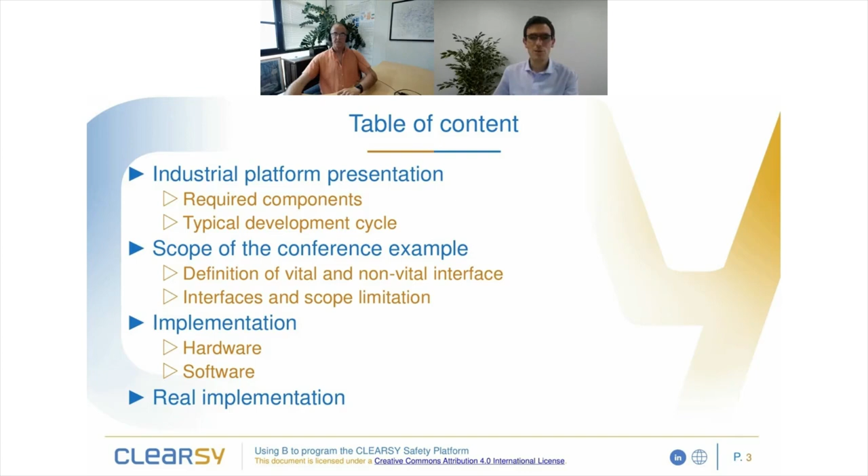We'll refine the level crossing example in order to define what is vital and non-vital in terms of interfaces and how to implement it within the scope of this conference. Then we will dive inside the implementation for both hardware and software. And finally, we will see a real implementation with a physical mock-up with 3D printed barriers and some motors.

So for the sake of reusing existing work, in this example, we'll use the starter kit, which is provided by CLEARSY and offers 32 non-safety critical inputs and non-safety critical outputs, and which also offers a USB interface, which is convenient for the purpose of a demonstration.

For programming the board, you will need ICD4, which is a programming tool from Microchip. A programming cable, obviously, for connecting the programming tool to the computer board, and a few wires, so USB, DuPont wires, and obviously a laptop for development.

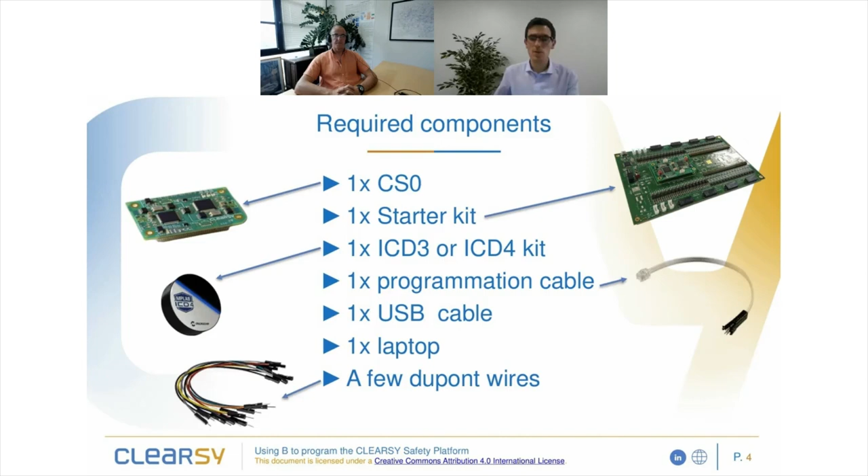Just to remind where we are in the overall flow of the presentation. So for the industrial version, you have more degrees of freedom. You can modify the scheduling of the main loop. You can define when you want to call the sanity checks, so the built-in self-test. The F transfer function can be designed in sequential or in interrupted code with B or C.

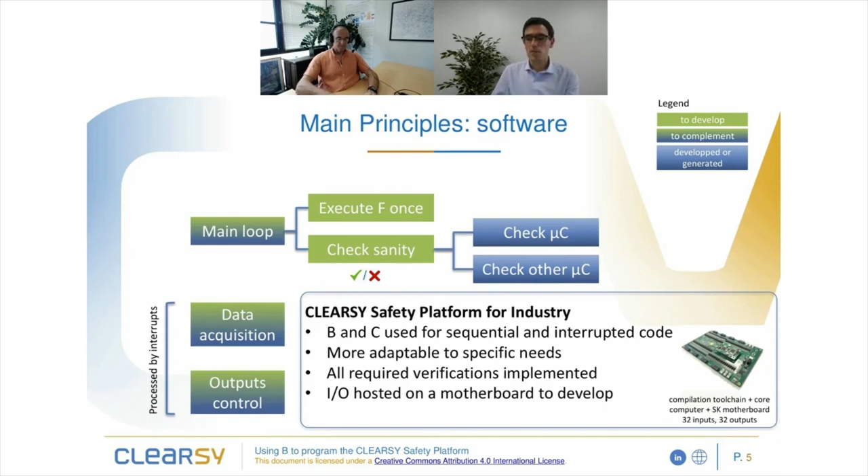For vital and safety parts, you will need to use the B language. And you have also full freedom in terms of design of the data acquisition and output controls. So basically, it's more adaptable to your own specific needs, but it also requires more work. Everything is implemented, so it's safety ready, and you have to design a motherboard in which the computing board will be plugged.

The development cycle of a safety critical system relies on standards, and standards imply having a very well-defined design cycle to ensure a high level of quality and reduce the risk of errors and bugs. So the first step consists in splitting the features between vital, so safety critical, and non-vital features.

Then you have to follow the prescription of the standard, obviously, and if you use the CLEARSY Safety Platform, then you will have to comply with what is called the Safety-Related Application Conditions, so SRACs, which are basically the exported constraints of the platform. So if you meet all the exported constraints, then you can rely on the fact that the platform is safe.

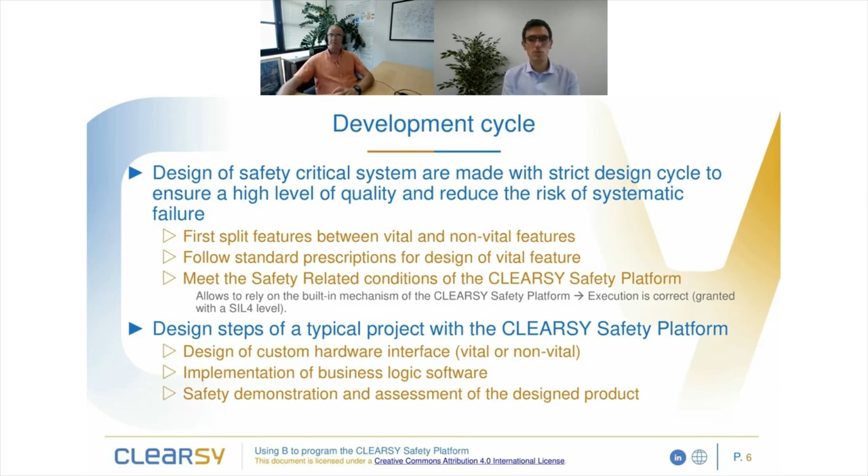The design steps for using the CLEARSY Safety Platform consist in designing your custom hardware interface. So here, it's basically the main motherboard plus an extra board that we will discuss just after. Implement your own business logic, so in our case, the level crossing logic. And finally, perform the safety demonstration and assessment to reach certification level.

So a few words about the safety-related application conditions of the CLEARSY Safety Platform. So it's a list of 24 exported constraints, which are addressing various fields of the topic. 5 of them are related to the system design, 11 to software, 3 to hardware, and 5 to exploitation and maintenance operation. For this talk, we will focus only on 3 of them, which will be detailed in the next slides. And if you want to have a look at the full list of exported constraints of the CLEARSY Safety Platform, you can find them on GitHub.

So the idea here is not to read all the text. I will give you some fast way to understand what is below. So the first one is related to restrictive value. So SRAC 1 is called restrictive value. And the idea is before designing a safety critical system, you have to define a restrictive state in which your safety property, the one you want to ensure, is obtained.

So in our case, basically, as Thierry said before, we want the barrier to be closed when there is a problem or when there is a train. So we define the restrictive state as barrier being closed, and we need to be sure that when there is a failure or when the platform is unpowered, then this property of barrier closed is held.

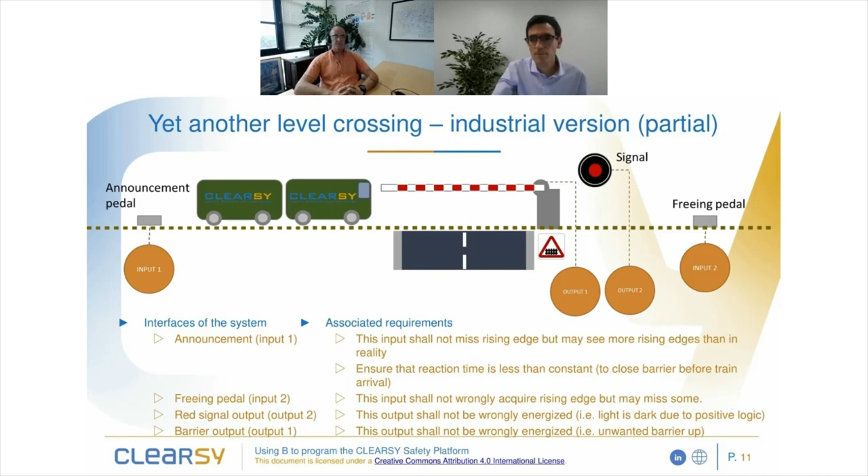Unfortunately, within the scope of this conference, we cannot cover all these interfaces with the proper integrity level. So we made choices. From a hardware point of view, everything will be done with the motherboard, so it's non-vital hardware. In order to have one vital interface, we add an extra board, which is a safety critical circuitry for driving one output, and it will be used for the barrier.

So the barrier will be controlled through real industrial hardware that can ensure a SIL4 level, the highest integrity level. And in terms of software, the management of the barrier will be done through a full vital implementation. For the inputs, we will only focus on the guarantee of timings. As the underlying hardware is non-vital, it does not really make sense to develop safety critical software for non-safety critical hardware input circuitry.

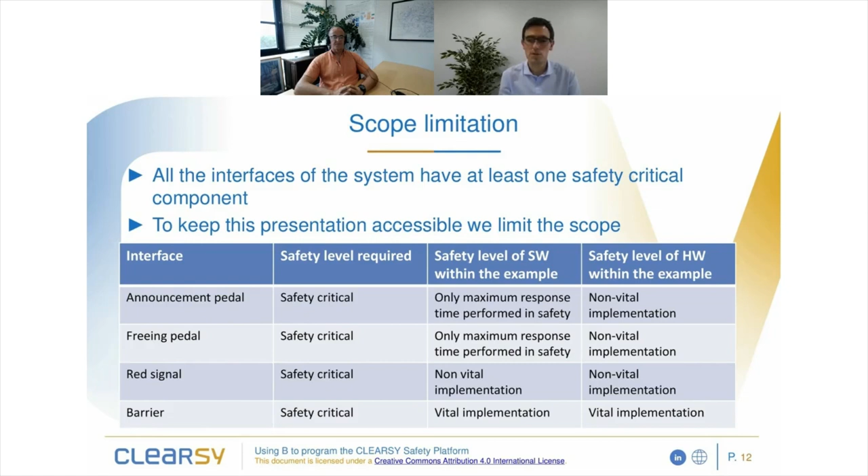Before moving inside the implementation, just one slide about the properties that we want to guarantee. So the property that we want to guarantee is that the barrier is open only if the system has seen during the last second the area not occupied. So in any other case, if during the last time slice between now and now minus 1 second there is one axle or more in the area, then the barrier shall be closed.

Here, the 1 second value is simply a placeholder. It's a software constant, and it corresponds as a first approximation to the time of travel of the fastest train between the announcement pedal and the road. So it's the time, the maximum delay that we can have before closing the barrier.

We had an extra constraint which comes from software analysis, which is that if a variable overflows, we can loop to 0 and consider wrongly that the area is free, and then the barrier will be wrongly commanded in an open state. So we limit the number of axles within the area, so between the announcement pedal and the freeing pedal, to 8.

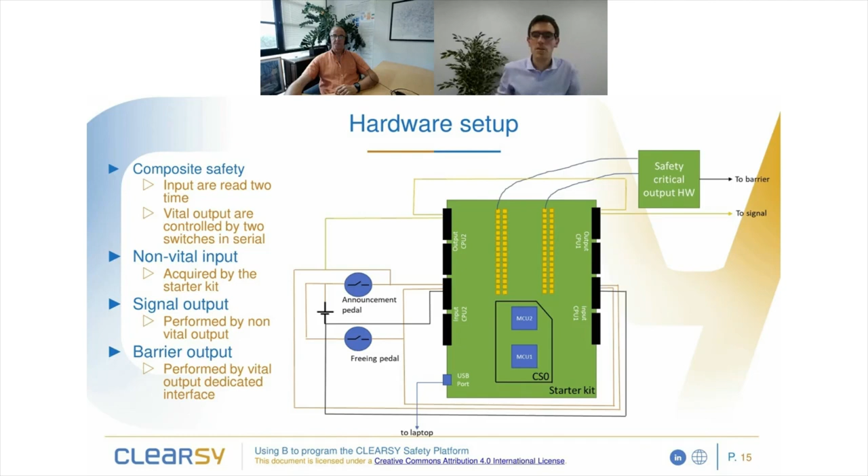In terms of safety outputs, we use 2 relays in series. The use of 2 relays is also motivated by composite safety, so each relay is controlled by 1 microcontroller. And if you zoom out from the board, you can see the safety critical output dedicated board as a converter from 2 frequencies into 1 on-off output. 2 frequencies, because frequency 1 is generated by the first microcontroller and frequency 2 is generated by the second microcontroller. And we use a frequency because if the platform is frozen and keeps the current state, then it's no longer a frequency and the output will be restrictive and the barrier will close.

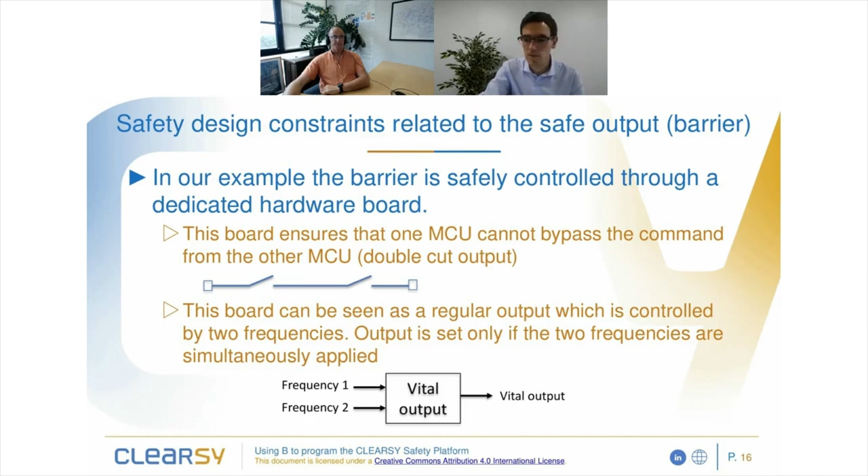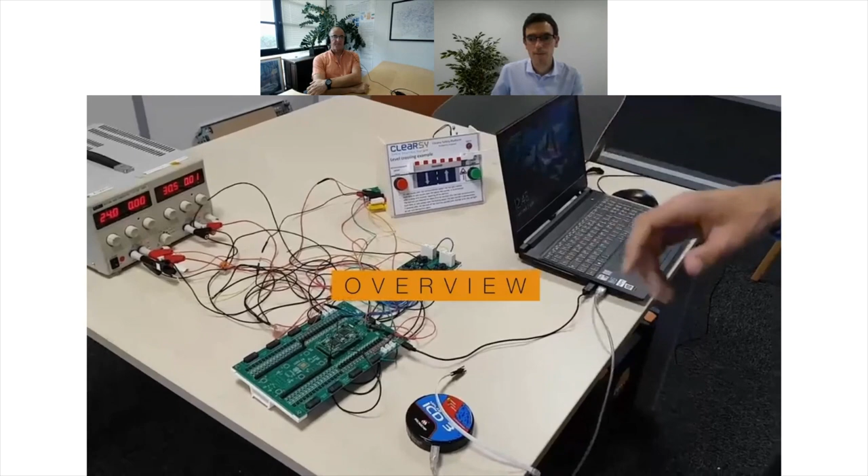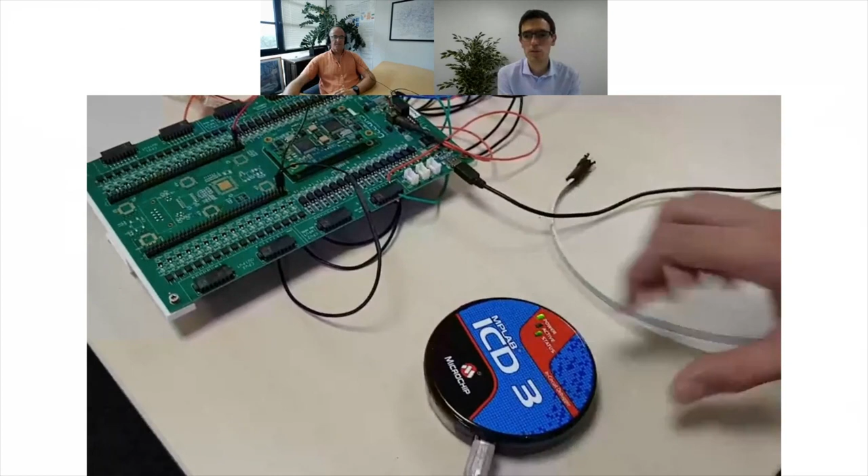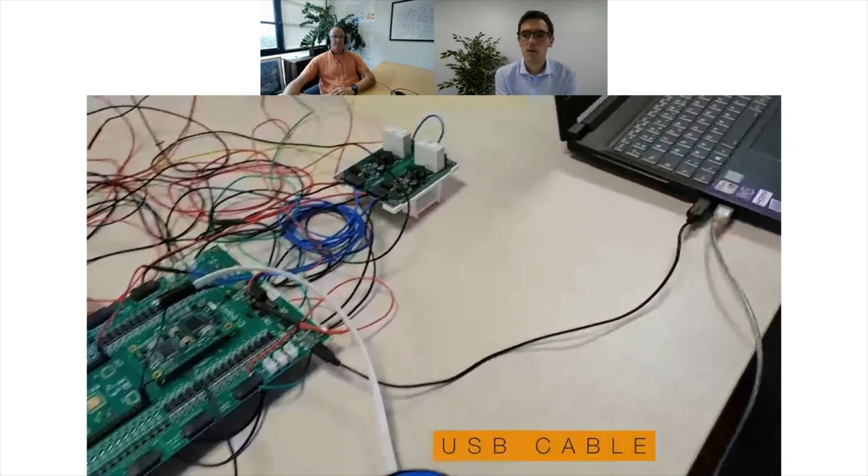So a quick overview of how it looks on the desk in the lab. So here you have the full setup. So that's the CLEARSY computing board. It's only a computing node with the 2 microcontrollers. Here you have the motherboard, which provides inputs, computer interface, outputs, and a way of plugging in the computing board. Here you have the programming tool from Microchip, the programming cable, which on one side is plugged into the programming tool and on the other side will be put directly on the vital safety computer. 1 USB cable, okay. And the software design laptop.

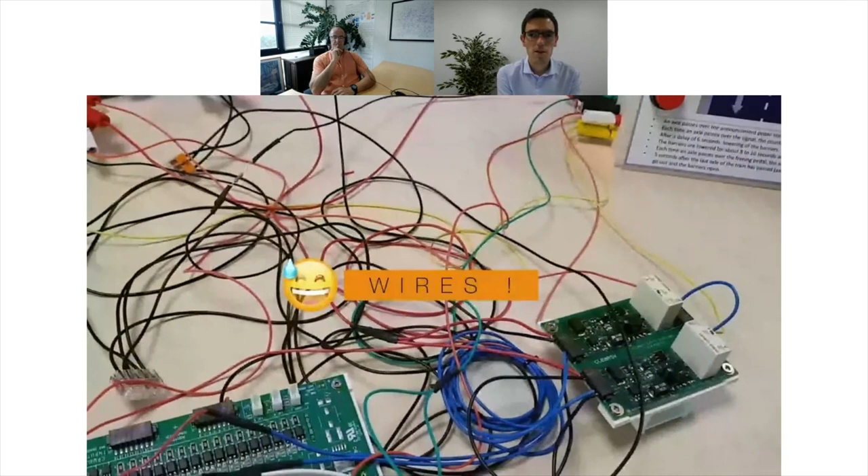Here you have the safety critical output board, the dedicated one with the 2 relays that are in white. So the white boxes are the relays, and you have 2 independent channels. In the middle, you have a lot of wires. And here you have a plywood plus the barriers, the 3D printed barriers, and the 2 buttons for entering and exiting the area.

In terms of software, the CLEARSY Safety Platform software is bundled inside a single tar file, which contains documentation, ready to compile examples, and the official CLEARSY Safety Platform library, which is a precompiled binary library, which provides all the primitives for the safety built-in self-tests and other software primitives and functions for performing your work.

In terms of design, what remains is to design the non-vital source code, which will be located in the nr_src folder, nr for non-replicated and src for source. Here you will find basically the driver interfaces for your custom interface and all the scheduling of the application. The safety critical software will be written in the B formal method and will be located in the r_src folder. And you will find the model for counting the number of wheels in the section, how to generate the frequency for the safety critical output hardware, and the deadline mechanism for ensuring that the inputs are polled at the correct pace.

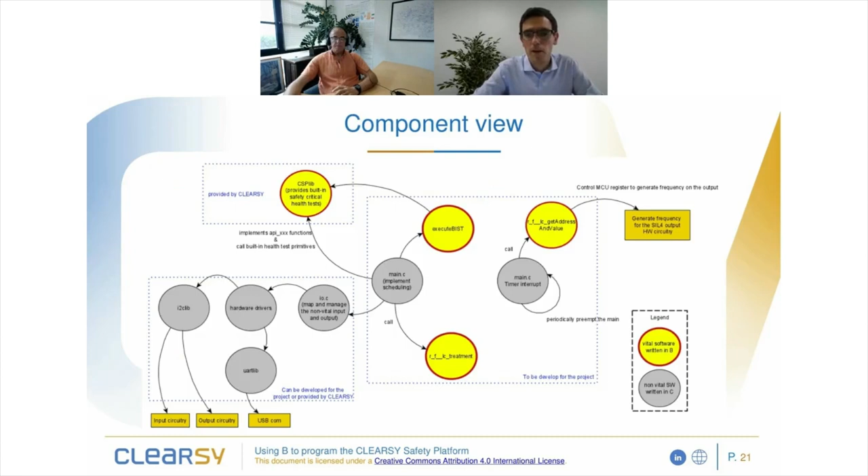So the component view: in yellow, you have the safety critical software, which is developed in B. And in gray, you have the non-vital software. In the middle, you have the project-specific part. On the middle left, you have the main.c that is calling the built-in self-tests and calling your own custom logic, the LC treatment, level crossing treatment. And in the right of the middle box, you have the interrupt, also implemented in main.c, which is calling another part of your B model.

On the left of the picture, you have all the driver layers in charge of the interface with the real world. All these parts are hidden in the education version, but are available for the industrial version. And on top, you have the CLEARSY Safety Platform library, which provides some API entry points and also all the built-in self-test primitives.

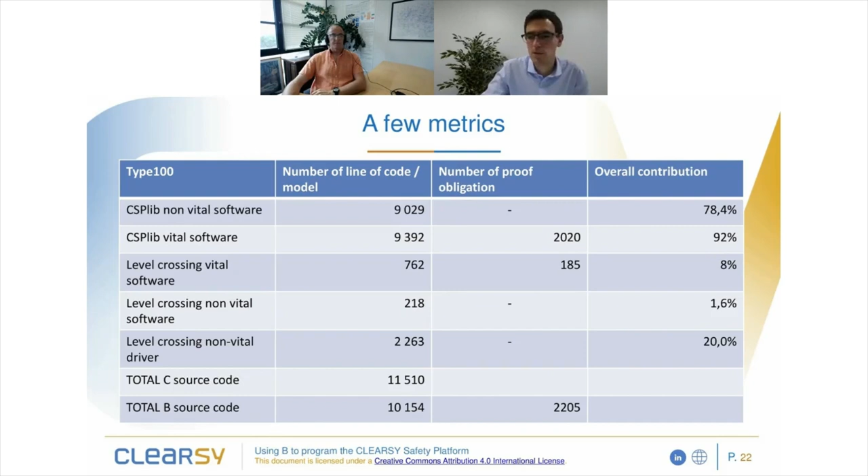A few metrics about the software. We compare here what has been developed specifically for the level crossing in comparison to what has been performed for the CLEARSY Safety Platform library. So in a nutshell, in terms of safety critical software, level crossing only represents 8% of the work. And in terms of non-vital source code and drivers, the split is 20% for the example and 80% for the platform. So it's worth using the CLEARSY Safety Platform. It will save you a lot of time.

So for getting the inputs, you can write regular C and you can get some primitives from the platform. In our case, nr_f_get_time_ms and nr_f_get_time, NR for non-replicated function. These functions are provided by the CLEARSY Safety Platform library and provide the system time since the startup of the system.

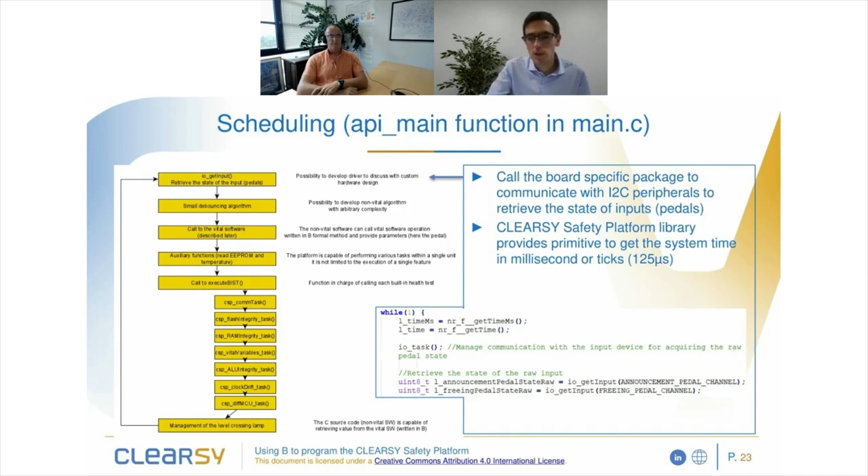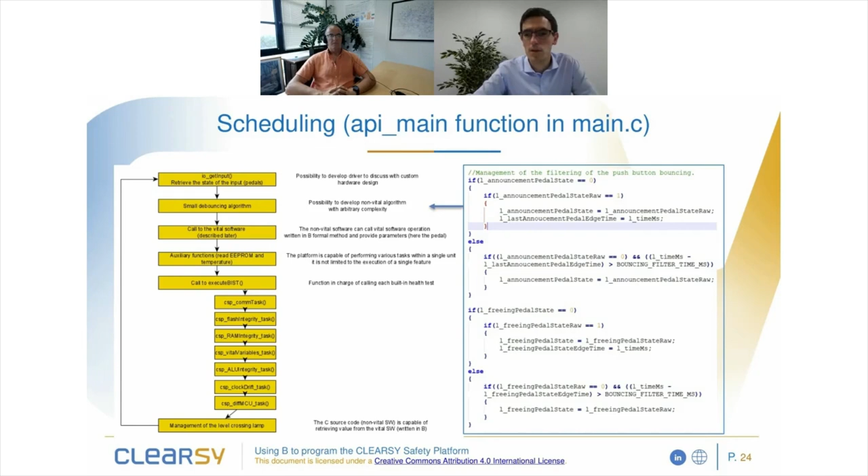The second part is the debouncing algorithm, so there is no need to dive into how we debounce a push button. It's not really interesting, but just to see that we can perform arbitrary logic and algorithms directly written in C.

Then we have to call the core part of our application, which is rf_lc treatment. It's an operation of the B model. So the software is replicated, and here we see that due to this replication, we have to call replica 1, so r1__lc treatment, and then r2__lc treatment. But here, the two functions are generated, and when you write your B model, you only have one operation to write.

Then we have the built-in self-test. So here we made the choice to write them in sequence and to call them in sequence. Once again, the scheduling strategy is free to the end user. So if you have an application where your timing is constrained at some time and not at other times, you can decide to perform part of or all of these tests at a different moment.

And finally, we have the management of the level crossing signal. So what is interesting here is that we can retrieve from the C source code information from the B model. So non-vital software can read some values from the safety critical software, and it's performed with getter functions. And here we need to call only one because the guarantee that the two replicas have the same value is ensured anyway.

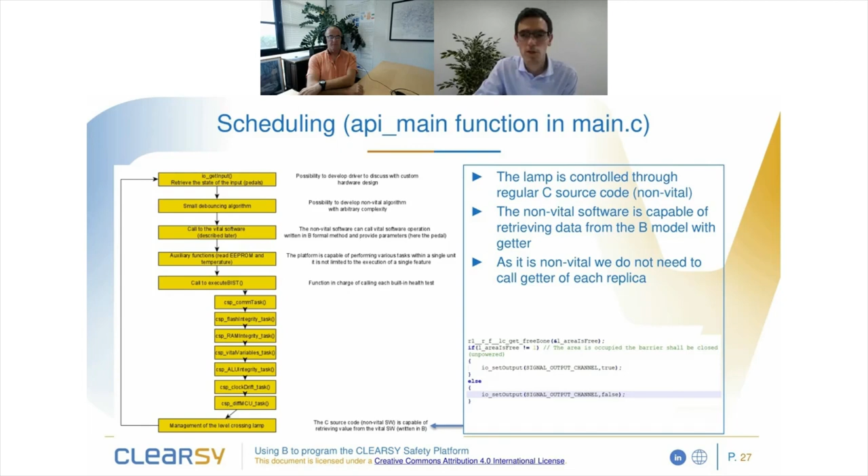At this stage, we have the management of the inputs, the management of the signal, and the remaining part is the barrier itself. So as said before, we need to generate a frequency to control the barrier. The frequency is generated with a timer interrupt inside the microcontroller. So the timer is always running and the interrupt service routine is always executing since the beginning. And it will apply a square wave or not, depending on the state of the B model. And the value inside the safety critical software is voted using the safety primitive of the library.

And we have two getter functions, one getter function replicated, which is called get set address and value, which returns a pair of an address and the value to apply at this address. And the address is the address of the register of the corresponding pins of the microcontroller. And the value is the value we want to apply on this pin. So this way, we can vote between the two replicas before applying an output in the physical world.

Now we can discuss in more detail the formal model, so the one in charge of the safety critical software. So we start with the assertion that defines our safety property, which is that the zone is free only if during the last slice of time between now and now minus 1 second, no axles have been detected inside the area. And then we have other conditions to say that the barrier is closed when the zone is not free.

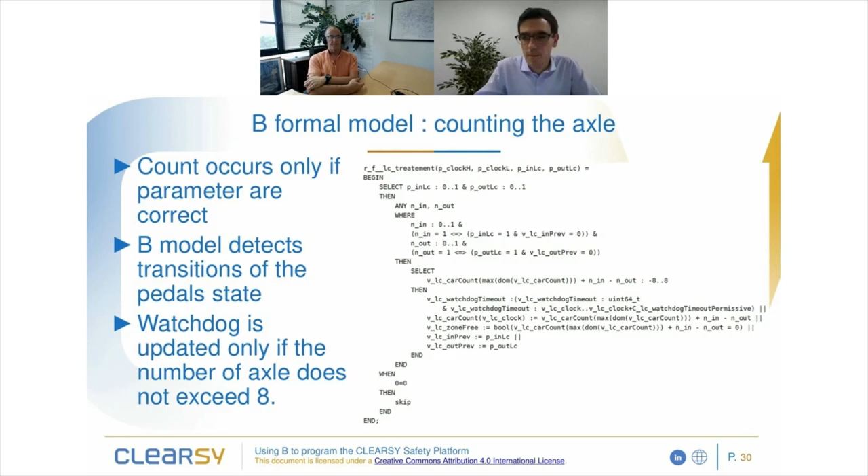And finally, we apply the state, so it's the getter we saw in the interrupt service routine of the timer. So it's simply a getter which returns the address and the mask of the register of the pins and the value we want to apply on the pin. And what is interesting to notice here is that we will return an on state on the pin only if the zone is free, so it's what we expect, but also if inhibition is false.

So what is inhibition? Inhibition is a variable managed by the CLEARSY Safety Platform, which will be true as long as not all tests have passed; it will become false when all the tests have been passed at least once. So if one of the self-tests has not been passed, then the inhibition is set. It's to manage the startup time of the platform when all the tests have not been performed.

When you have written all your source code, then you have to define a project, and it's done through the configuration file. So it's a text file in makefile format, which simply contains a list of predefined constants that you only have to fill in with the proper values, which correspond to the files that you are using inside your project. So you can modify compilation options, define where the manifest of your B project is, and so on.

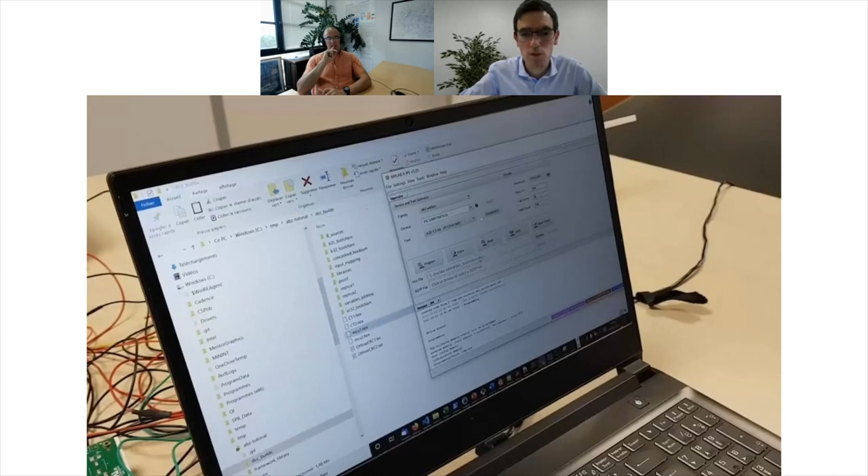Once the compilation is done, the results will be provided in a DCC builds folder, which will be automatically appended to your working directory. You have intermediate files and MCU1 and MCU2, which are the two binaries that you have to load on the target. When you want to load on the hardware target, you connect the programmer, you power up the board, and you click on program.

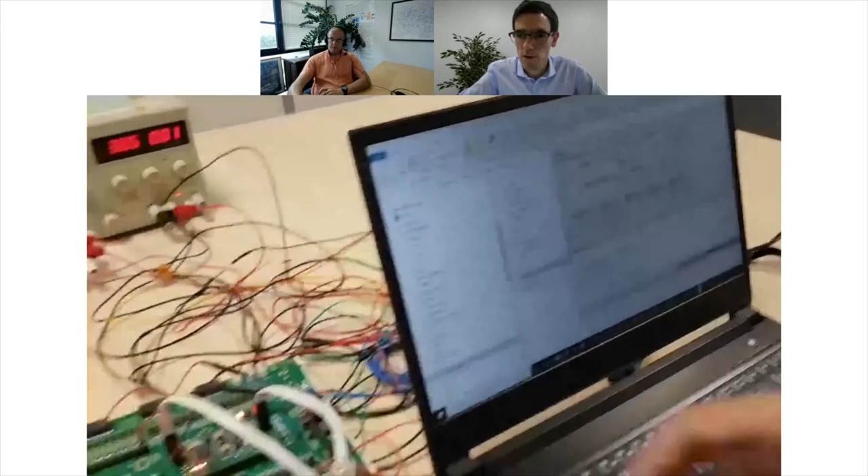Programming is performing. Once it's done, you disconnect the first microcontroller, you select the other binary, you connect the second microcontroller to the board, and then you click on program. And once it's done, you only have to recycle the power of the board, and then you are ready to play with your new software.

So, second video, how it looks like when it's loaded. Too many videos to find. Okay.

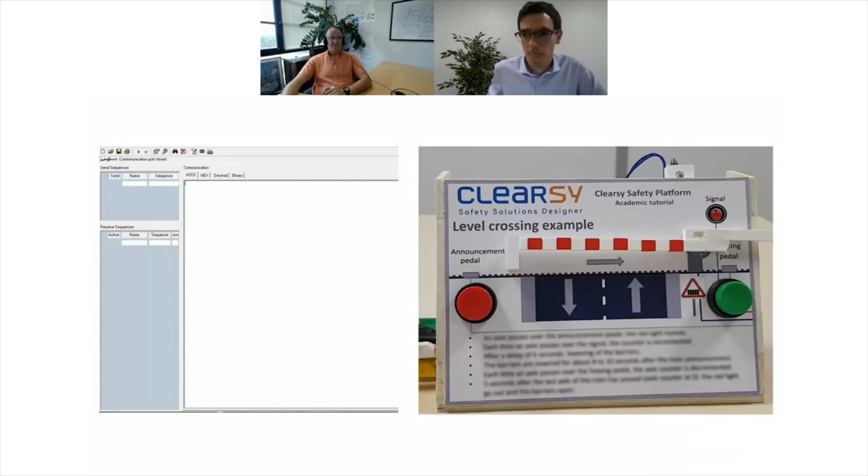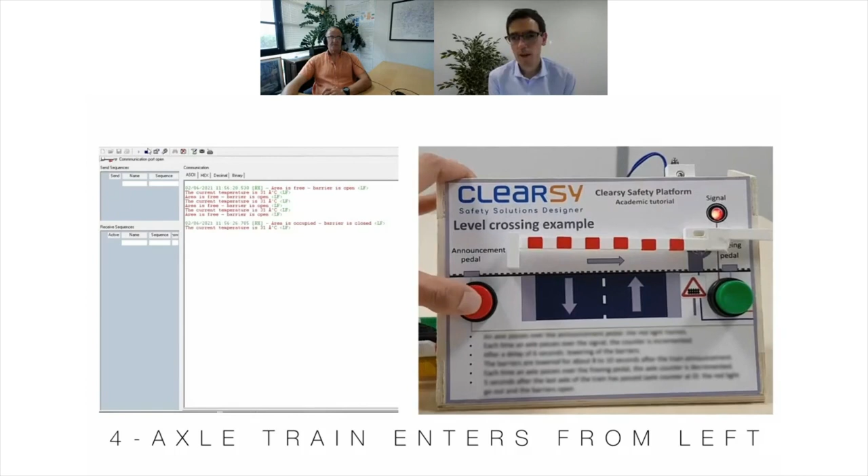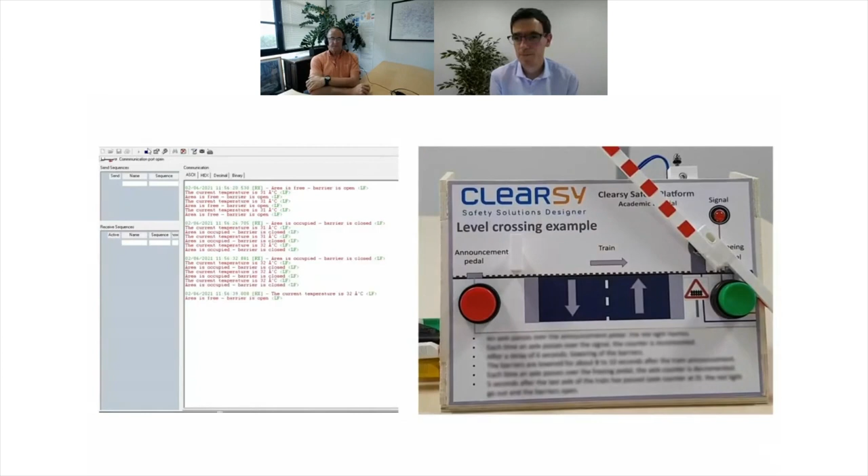So here you have the setup. At startup, the barrier is closed because we haven't performed all the built-in self-tests. When inhibition is removed, the barrier opens. We count 4 axles entering from left to right. The barrier is closed and the signal is on. We have the 4 axles leaving the area and the barrier opens. We had 1 axle, the barrier closed, 1 axle, the barrier opened.

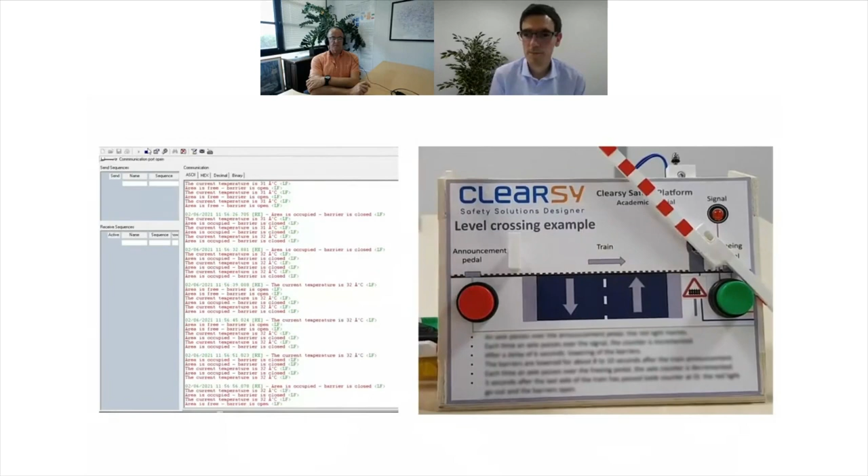And in reverse order, we have 4 axles entering from right to left, and 4 axles leaving the area. So that's for the nominal case.

We will now see what happens in case of dysfunctional use cases. We will discuss all the examples and scenarios before, and we will have at the end a video summarizing each of these cases. The first one is related to not calling the built-in self-test frequently enough. What happens in case of an overload of the CPU resulting in a slowdown of the execution? What is the result of a corruption of the flash memory, a corruption of the RAM, and the case of a systematic design failure?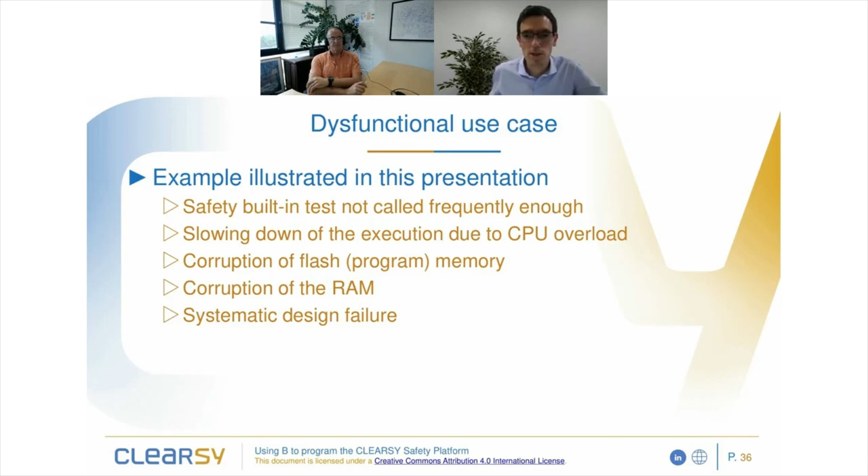So if we do not call the built-in self-test frequently enough, the system will simply shut down because we don't know if our platform is healthy or not. So we decide to take the safe state, which is barrier closed.

So in order to simulate this behavior, we replace the regular function in charge of calling all the built-in self-tests by a function that calls all the built-in self-tests normally during the first 15 seconds, and then we forget to call one of the tests by simply commenting it. And in this case, as we will illustrate after, the barrier closes after 15 seconds.

The second dysfunctional case that we can study is the slowdown of the execution. So it can be the result of denial of service. It can be the result of an exotic branch of your application that is executed once a year, but takes a lot of time before returning. So in this case, we will not acquire the states of the announcement pedal for a potentially long time, and the train may reach the road before we have taken a restrictive action. So there is a real collision hazard in this scenario.

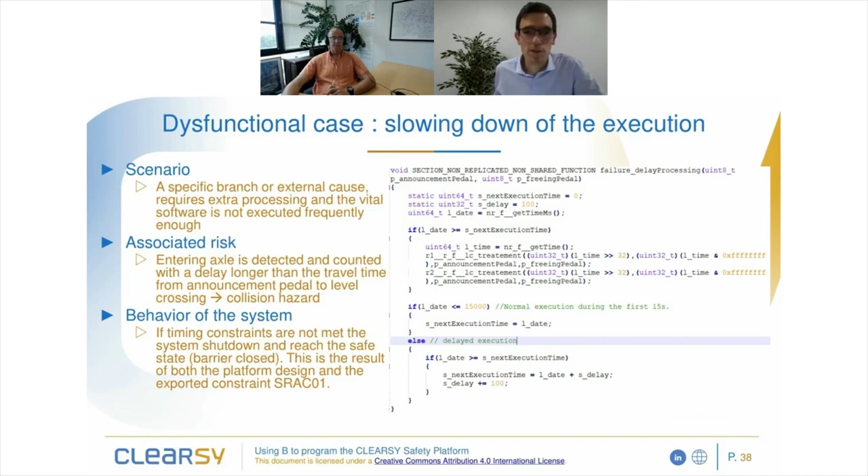So the behavior of the system in this case is to shut down because you don't meet the timing and you don't comply with the assertion that we have seen before. And in order to simulate the delay in processing, we have written this small function, which is called during the first 15 seconds, 15 for the same reason as before, to have enough time to go after the inhibition period of the startup. So during the first 15 seconds, we execute the software normally, and then we delay the execution, the call to the LC treatment function. And as it will be demonstrated just after, the barrier closes.

The case of the corruption of the flash. So during the life of your product, the memory can be corrupted. If it's a picture on your smartphone, it's not really critical. If it's the software of the level crossing, it can have a larger impact. So in order to simulate this behavior, we directly edit the binary file manually, and we flash the modified binary directly on the target. And we will see that in this scenario, inhibition will never be removed, and the board will start by complaining about a corrupted flash memory.

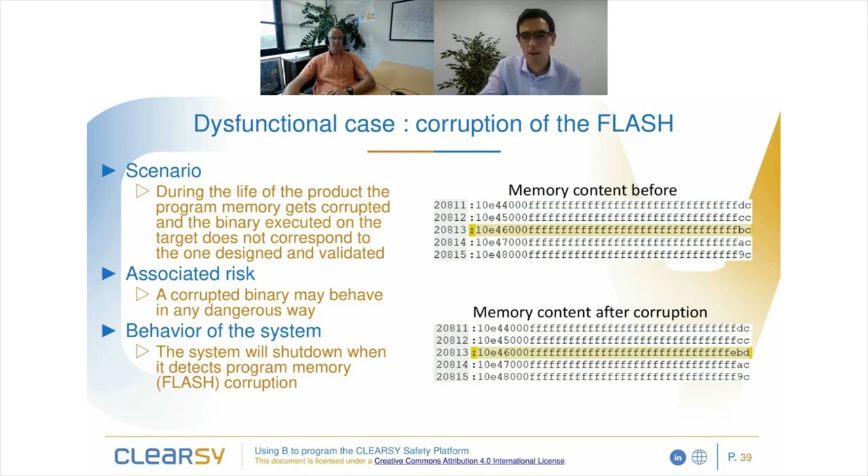Corruption of the RAM, so it can be due to a cosmic ray or an EMC perturbation. It can also be the case if you have one of the two compiling toolchains that produces an error, and one of the two replicas has a corrupted value. The associated risk is if you write the variable in charge of saving the state of the area, if it's occupied or not. If you modify it in the way that the area is free, and it's not the case, then you will have a barrier up, which is not allowed.

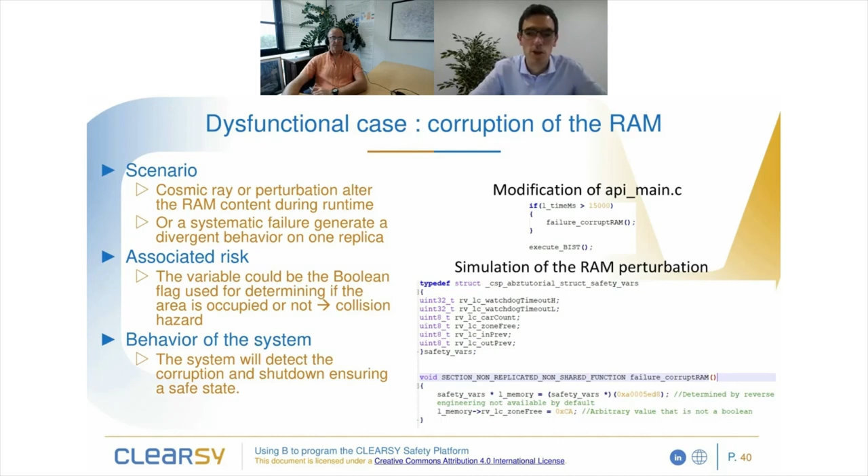So in order to simulate this behavior, we have added some information to the source code. This information is reverse engineered, so it's not accessible regularly from the C source code. So it's basically the organization of the safety critical variables and their addresses, and we write a random value, here 0xCA, inside the memory. And in this case, the corruption will be detected, and the system will shut down and the barrier will be down.

And the final dysfunctional case that we will illustrate today is a case of a design failure. So as explained before in the properties that we want to guarantee, we want to detect if there are more than 8 axles entering the area. So 8 here is for the convenience of using the mockup, because max uint8 is 256, and it's quite long to press 256 times on the button. So we have limited it to 8, but if we have an overflow, what we can fear is that due to operating conditions, let's say every train has 6 axles, you do some maintenance operation on the announcement pedal, and you count 3 axles during the night.

You remove your maintenance operation, and the first train entering the station the day after has 6 axles, everything is fine. 6 plus 3 is equal to 9. Yes, in mathematics it's correct. If the variable overflows after 8, it's equal to 0. And in this case, you will have a train in the area, a counter of axles that is equal to 0, and a barrier that is up.

So there is a real collision hazard, and in this case, if you don't prove your model, and if you don't analyze this kind of failure mode, and you have a systematic design failure, you are rightly executing the wrong function, and in this case, you will kill people.

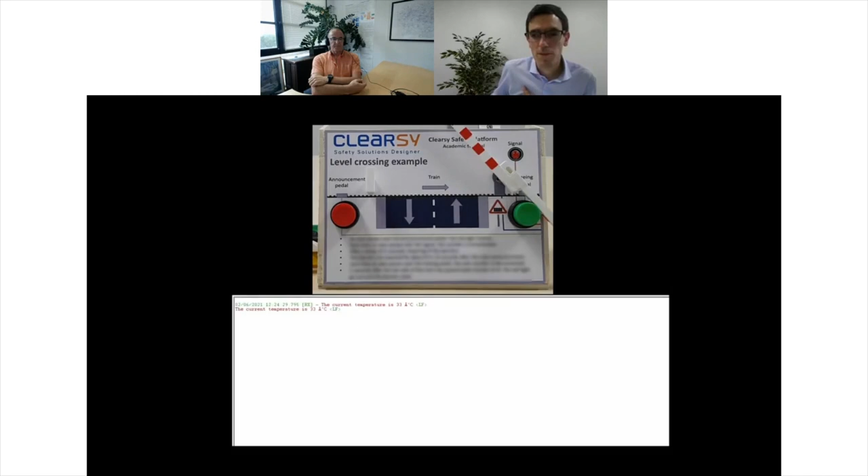So a video for illustrating all the dysfunctional cases that we saw before. So they are in sequence. So the first one is the built-in self-test. So we do not call the built-in self-test frequently enough. The barrier is open, and then after 15 seconds, it fails. So you have a message saying that you have not reached the deadline.

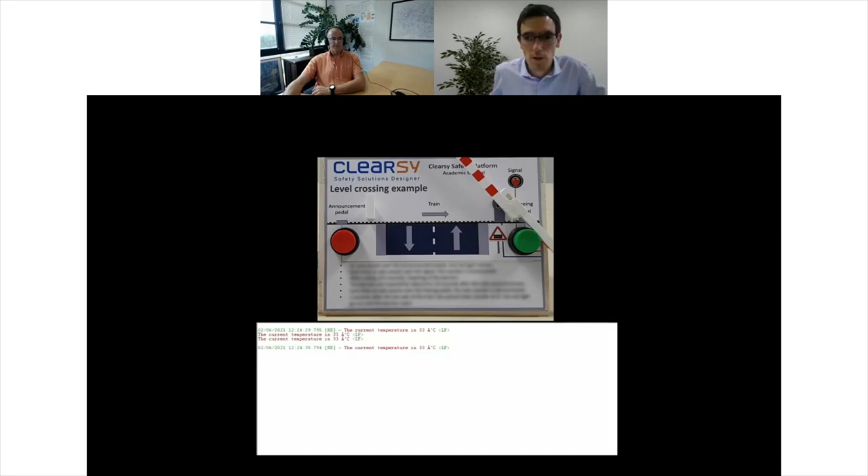The second one was the slowing down of the execution. So same, it looks very similar, but in fact the result is always the same. So the corruption of the memory, you have flash memory corrupted printed all the time inside the debug interface, and the barrier will not go up.

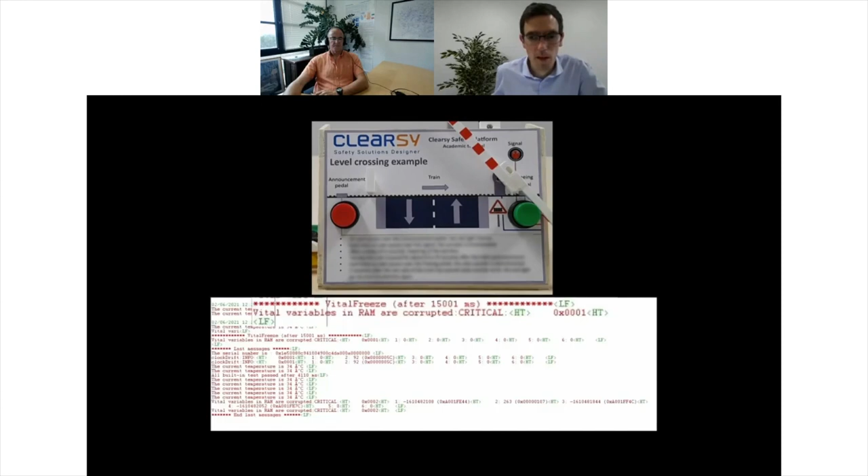What you can notice here, and it's also the case for the other videos and use cases, is that the signal is dark. It's because it's managed in a non-vital way, and here we shut down the platform, so we cannot provide energy to the outside. So due to gravity, the barrier closed, but the signal cannot be on.

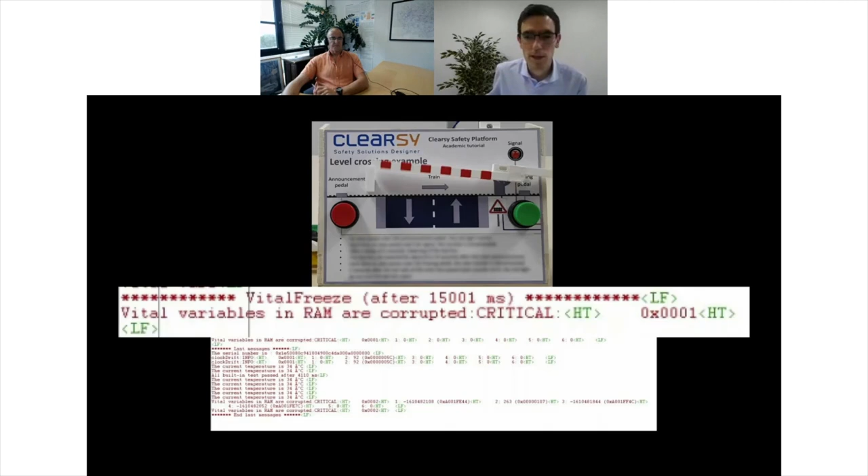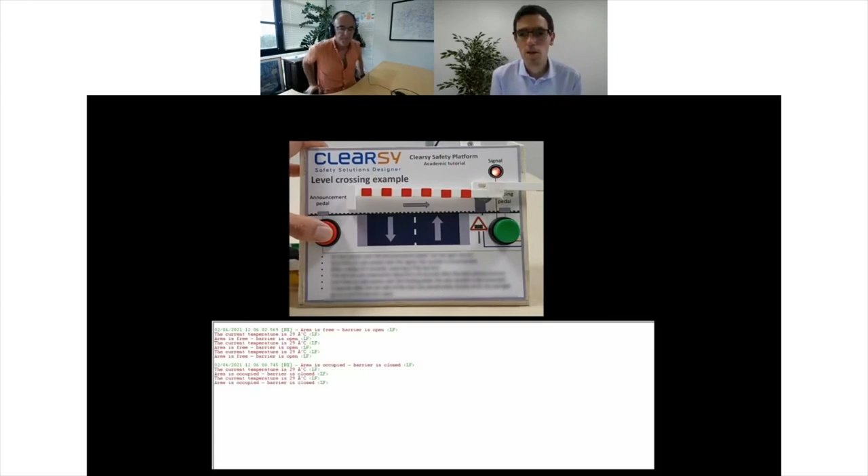And for the systematic design failure, we will press 9 times the entering button, so the announcement pedal. And here you have an error, and you can see that even if we press 9 times the button for freeing the area, the barrier remains closed. So in case of failure, in case of shutdown, the red LED lights up.

We have a question before moving to the next part, the last one from Jaya Prakash. Is this level crossing model installed by CLEARSY anywhere physically, or is it only a prototype? Yeah, so it's only a prototype. There are various strategies, and the way level crossings are implemented depends on the country and customers. So it's only an example here to be representative and to have some material to discuss.

The ideas used inside the level crossing have been used in other projects and applications, but the level crossing itself is not developed, and this model is not specifically for a level crossing.